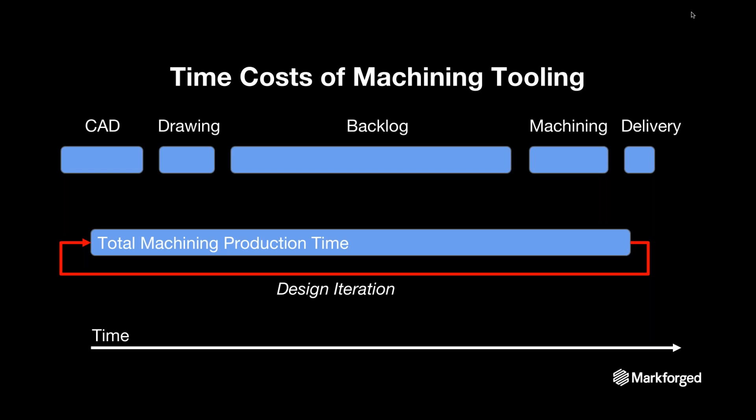And after machining, you get the delivery. So this is your total machining production time, which equates to one design iteration.

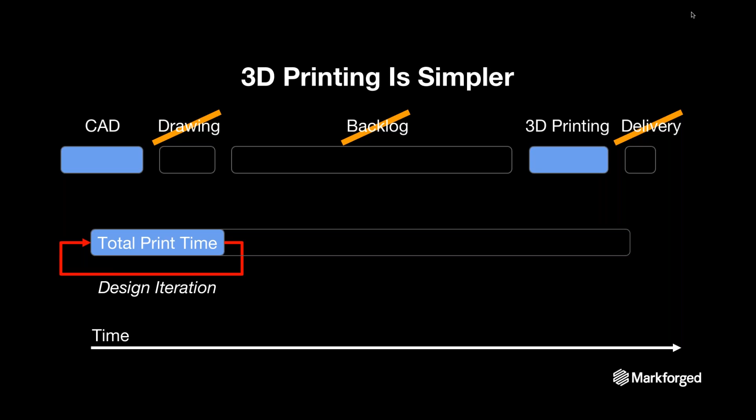With 3D printing, that becomes a lot simpler. You can go from a CAD file to a 3D printed part in your hand, skipping creating a drawing, skipping the backlog of submitting an RFQ, getting signature sign-off, submitting a PO, getting that part delivered, or even waiting in line for one of your machines to open up. You drastically shorten your design iteration time.

So within the same amount of time it took you to get Rev A in traditional manufacturing, you're able to go to Rev B, Rev C — arriving at your final part a lot quicker.

And that's not even counting the number of iterations you can have per print. Within the same amount of time it took to traditionally machine one iteration of a tooling, you can print 3 different iterations for that same amount of time, maybe 4, maybe 5 different iterations.

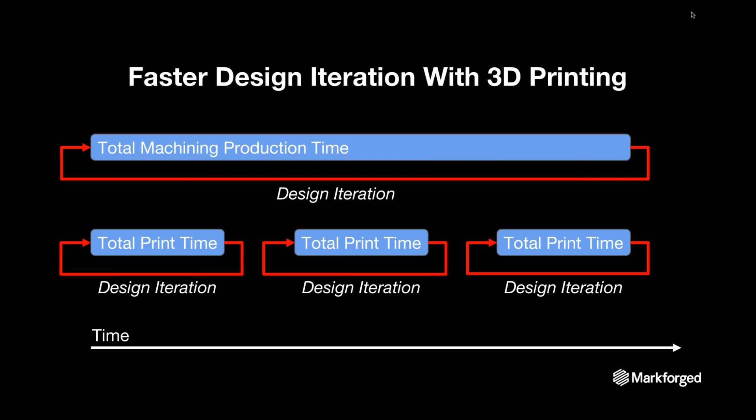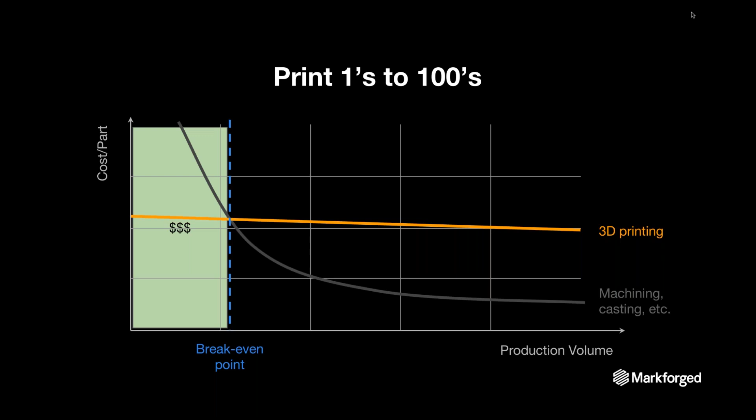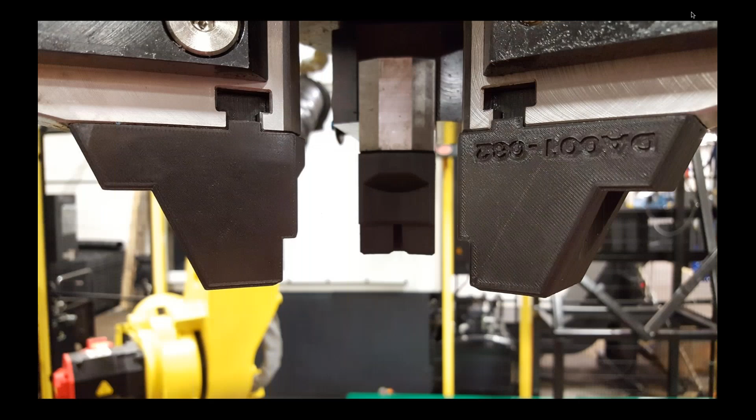For example, this is one of our customers, called Dixon Valves. They worked on gripper jaws that grip the coupling, and they had a set of three of these. These gripper jaws had to be very conformal, had to be strong, and had to withstand corrosive environments, so they had a lot of requirements. These were traditionally made in metal, machined in metal.

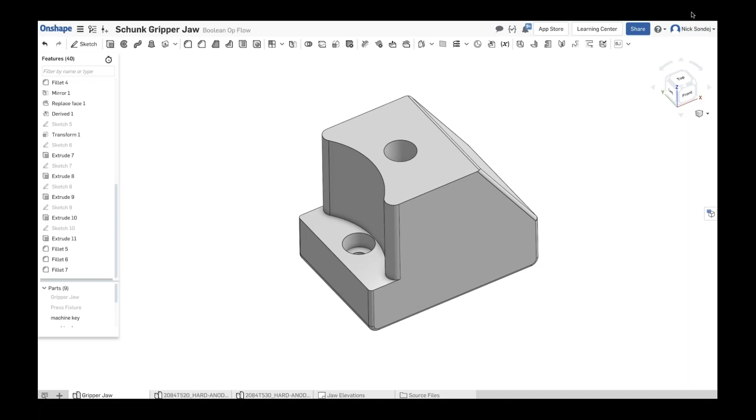A typical blank of a gripper jaw looks something like this. I'm going to hop over to my CAD software and show you what we were able to do very quickly, in 15 minutes, to make a conformal jaw.

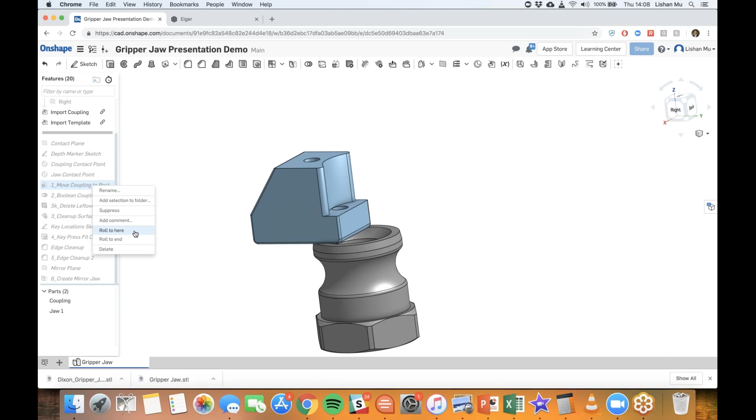This is the blank gripper jaw we were looking at. We pull in the coupling and position it onto where your gripper jaw is. You can see there's a bit of an intersection here because we want that conformal geometry of the coupling on our jaw. Taking a Boolean subtract, we're going to remove away that geometry. I'm going to hide the coupling, and you can see the missing area now where that conformal geometry is imprinted on the gripper jaw.

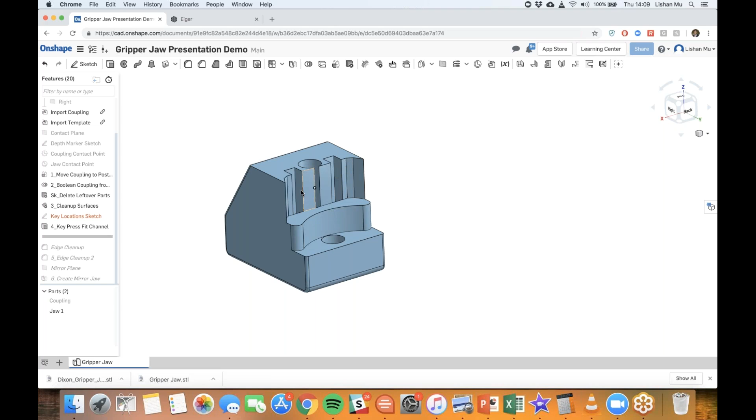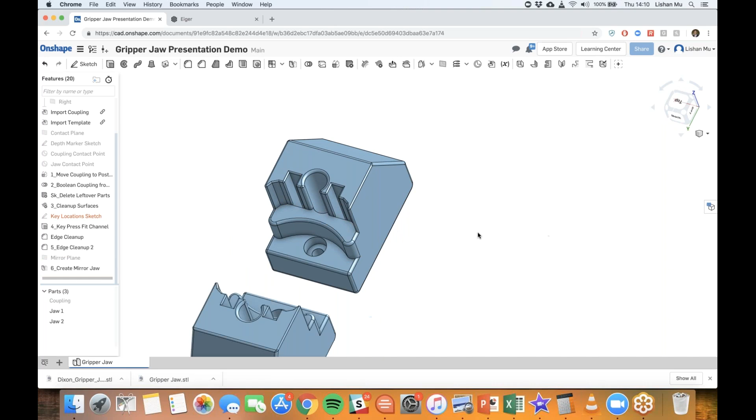From there, I'm going to clean up some of the surfaces and add key insert channels. Because that coupling is metal, and our base material, called Onyx, is a nylon 6 based material, over time as you rub a metal part against a nylon part, you'll wear away some of the surface, making your conformal surface out of tolerance. So we created channels here to use off-the-shelf key inserts as wear surfaces, extending the life of our jaw. From here, we clean up the surfaces, add some fillets and chamfers, take away the sharp edges, and simply mirror the part. Now you have a set of jaws that are conformal to holding this coupling.

So that's the CAD part. Now we're going to take it into what's called slicing, using Markforged slicing software called Eiger. I've already imported it here; the import is fairly easy to do. All you have to do is drag and drop, or you can upload from your library.

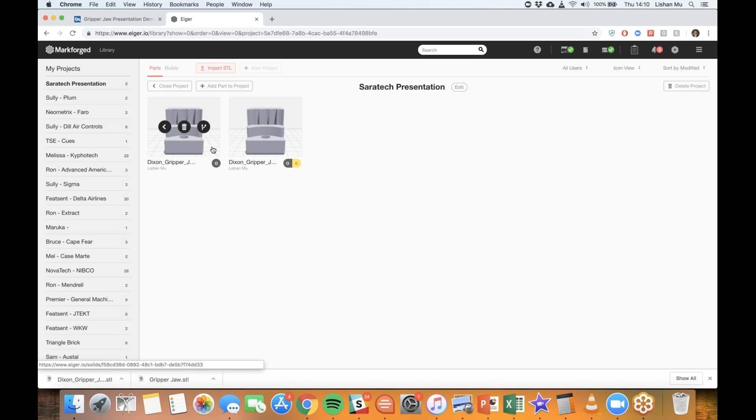So from here, I'm going to click into my sliced part. This is that jaw that we just designed here in our CAD software. This jaw, designed in CAD, I imported as an STL into our slicing software.

At default, we've added settings to optimize the print for your part. So once you upload your part to Eiger and save it, it's already pre-sliced. All your settings on the right-hand side can be changed, but you can leave it at default and hit print. The information shows how much it's going to cost due to material.

This jaw, one jaw, is going to cost $5.96. It's going to take about 5.5 hours to print. From here, you can dive into whether or not you want to add any kind of reinforcement, which I'll go over in a minute in my presentation. That fiber reinforcement is what makes these parts strong.

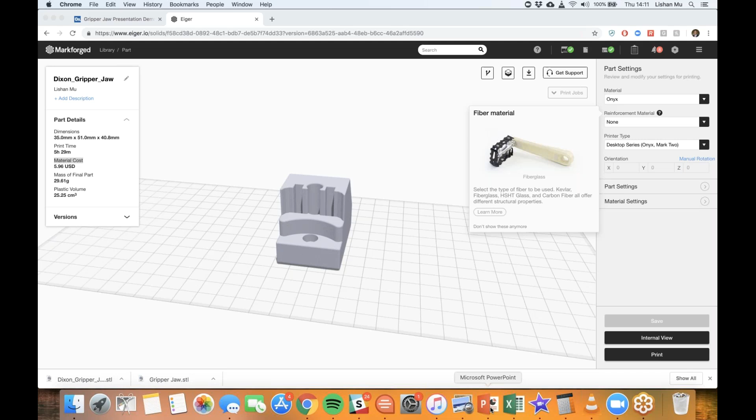So that's the part, upload it into Eiger. From there, you just change up your settings if you need to, hit print, and you'll have your part in your hand.

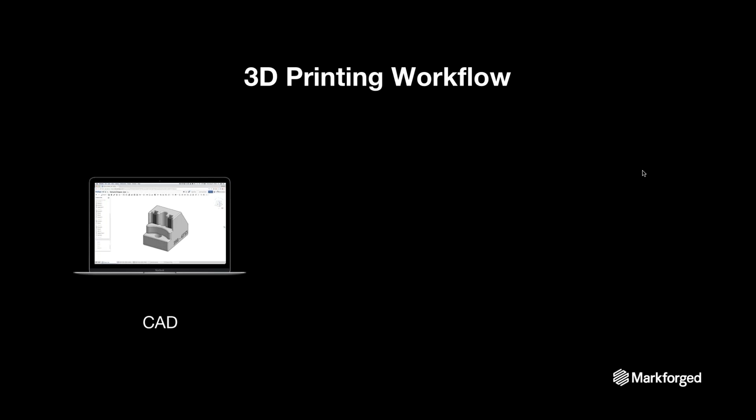So just a little overview of the 3D printing process. Like I said, it goes from designing in your own CAD software, to placing it into some slicing software, and then hitting print.

So what is slicing? We have a question here.

Jim wants to know, do you offer or do you have any training videos or anything that they can follow up with after this presentation?

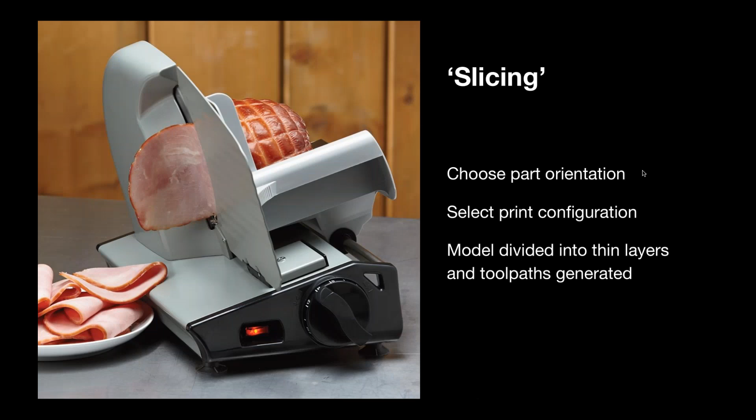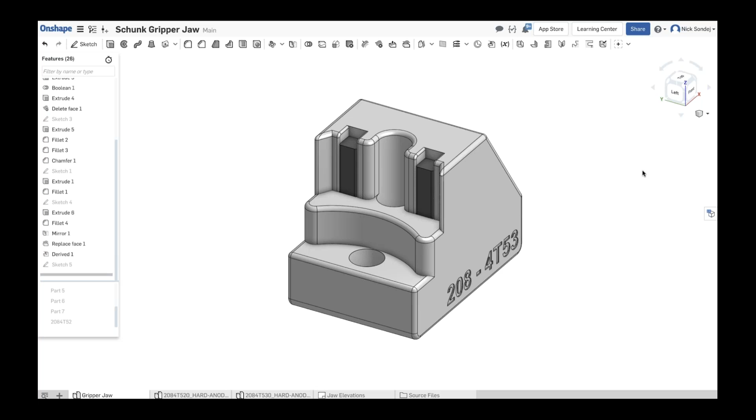Now, some of you might have a question: what exactly is slicing? You can imagine at your deli, you have your ham, and there's a slicer. What the program is doing is taking your CADed part and doing just that. It's taking it layer by layer and producing G-code on how to move the print head in order to print that layer. So depending on how you orient your part, how you configure it, how dense or hollow you want the infill, what kind of fiber you want to reinforce your part, the slicing software divides that part into however many layers and produces the G-code to the printer in order to actually print your part.

So taking that Dixon Valves gripper jaw, it's taking slices layer by layer and then reproducing it. Very similar to how CNC has CAM software, 3D printing has slicing software.

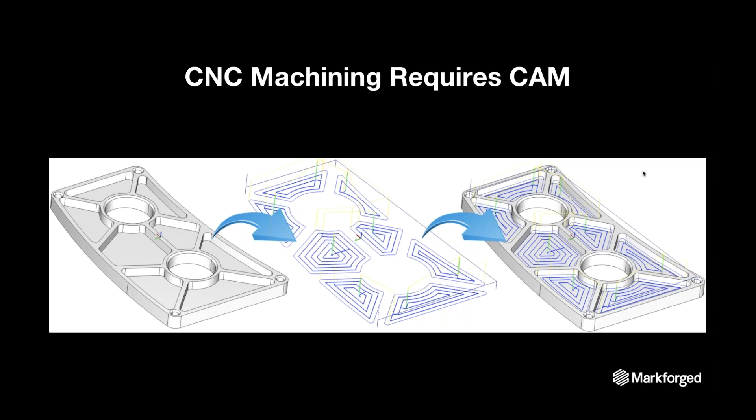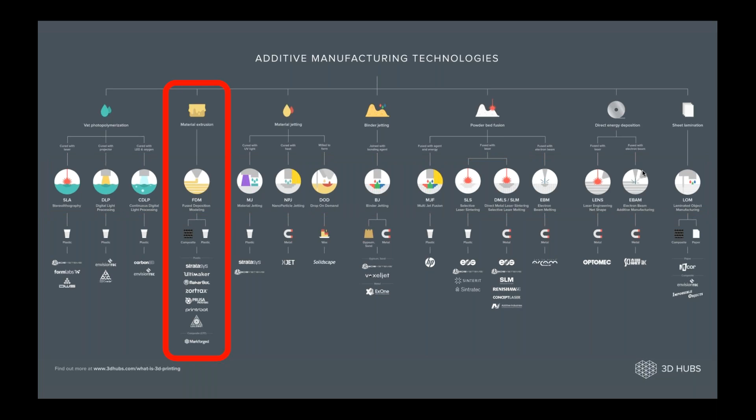So there are a lot of 3D printing solutions out there. On this page itself, you can see there's almost over 12 different 3D printing technologies. Ours falls into FDM, or extrusion-based 3D printing. Imagine a very high precision glue gun that's extruding the onyx material layer by layer to produce your part.

So this is kind of a very high level, rudimentary look at what a 3D printed part would look like.

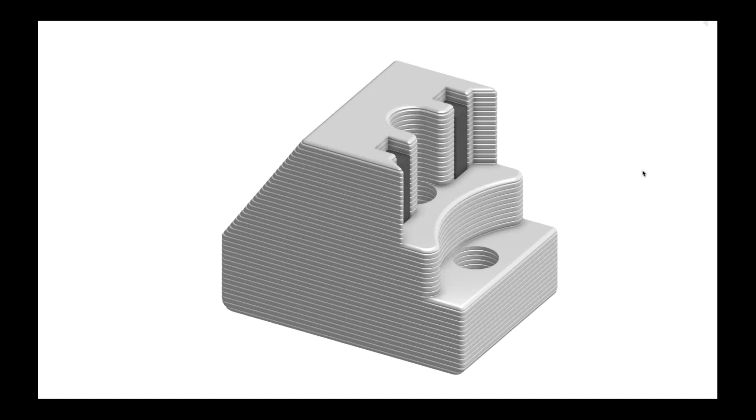This is where Markforged separates itself from all the 3D printing technologies out there. Even with extrusion-based 3D printing, where it's a high precision glue gun, we have what's called continuous filament fabrication. So what that means is you design your part in CAD, you slice your part, and during the slicing phase, as I was showing you earlier in our slicing software, you can reinforce your part with Kevlar, fiberglass, or carbon fiber. Those three options allow you to reinforce your part, making it as strong as 6061 aluminum and capable of replacing tooling, fixtures, and jigs on your shop floor.

Going from the slicing software, it sends over the print information to your printer, and it just prints, and you walk away.

So once again, we're looking at these Dixon valve gripper jaws. This is kind of what it looks like in a rudimentary sense when we lay in that continuous filament or fiber filament. We're taking a cross section of that part. Let's say it's printing up to this point. What it's doing is laying in the fiber continuously, in a continuous strand, around the perimeter of your part.

Now, a lot of companies out there are beginning to tell customers that they can print in carbon fiber. What they don't communicate is whether those are short strand fibers or continuous fibers. We are the only company in the world that can print in continuous fiber, because we have the patent on that technology. That's the bread and butter. That's kind of how we were founded—we wanted to print in carbon fiber, and having just chopped or short strand carbon fiber wasn't going to be strong enough.

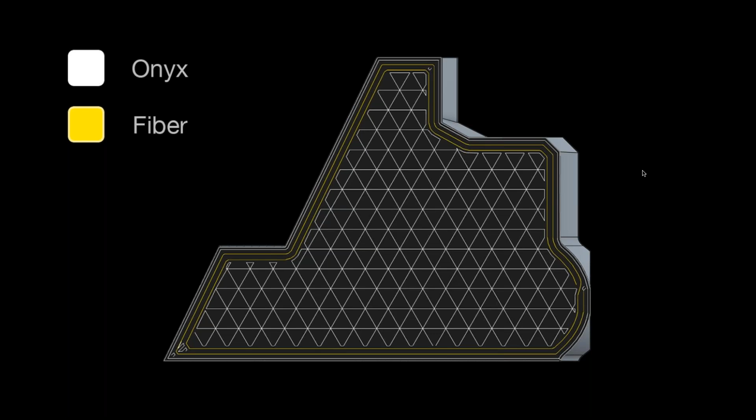Our Onyx material, our base polymer material, already contains chopped carbon fiber. That chopped carbon fiber makes our parts already 20 to 30% stronger than ABS, or what I like to call the gold standard of 3D printing materials. It's already stronger than ABS. It's when you add in the continuous fiber, whether it be fiberglass, Kevlar, or carbon fiber, to reinforce your part, that's when you're able to use it for functional prototyping, functional tooling, functional jigs and fixtures, and CMM fixtures.

And this is what it actually looks like in real life. This is an actual cutaway of a part, one of those Dixon gripper jaws, showing the continuous fiber that's routed on the perimeter of the part. And on the inside, you can see there's that triangular grid pattern.

That's our hollow infill. You will actually have a honeycomb hollow infill through your part: one, saving on material; two, saving on print time; and three, saving on weight. That was significant for Dixon Valves, because if you imagine these gripper jaws, three of them are picking up something every day, moving it to another spot for machining. As it goes through these motions, any kind of reduction in weight increases efficiency and increases the life of that robotic arm.

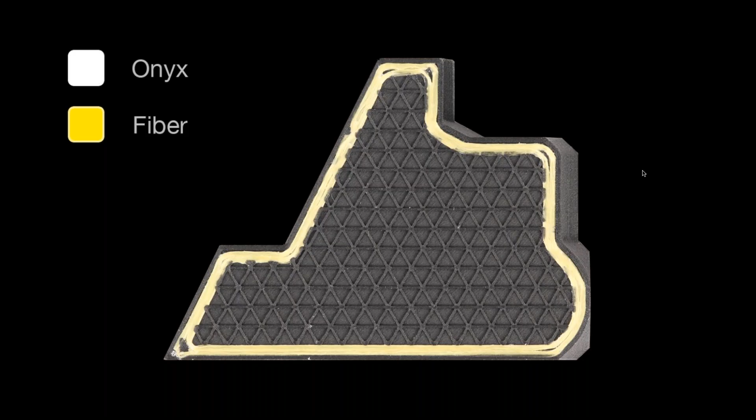Our metal printing solution uses what's called atomic diffusion additive manufacturing. So as opposed to DMLS or traditional metal printing, which uses metal powder, our process actually does not have free-flowing powder. All that powder is contained in a binder material when it's printed. It stays in the binder after it washes, where it gets debound a little bit. There's wax and a polymer that's actually holding the metal powder, and that metal powder doesn't get sintered until it goes into the sintering oven.

So this process, the ADAM process, is kind of a fusion of extrusion-based printing—the high precision glue gun—and metal injection molding, which has been in the industry since, I believe, the 50s. That process has been around for a while. We're just leveraging the back end and hijacking the front end. So instead of injecting a binder with metal powder in it, we're printing with a high precision glue gun, and then washing and sintering it the same way the MIM industry would do.

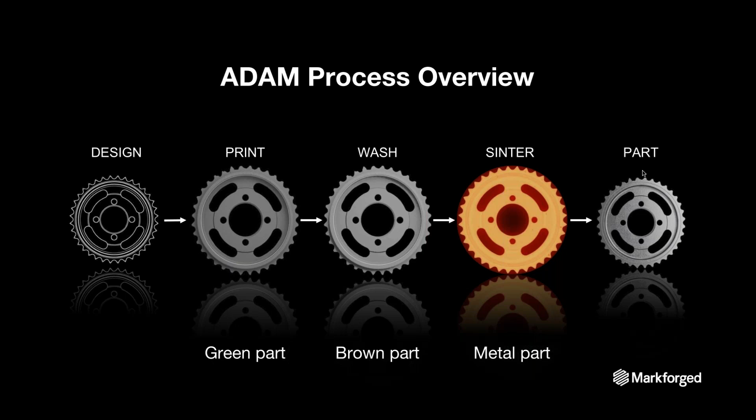Then you have what's called a green part, or a brown part after it comes out of the wash. The wash removes the wax binder. And then when you sinter it, it finally vaporizes the rest of the binder material and sinters your metal powder.

After sintering, the polymer is vaporized and the metal powder begins to, due to molecular forces, start attaching to each other and binding together to form a fully dense part.

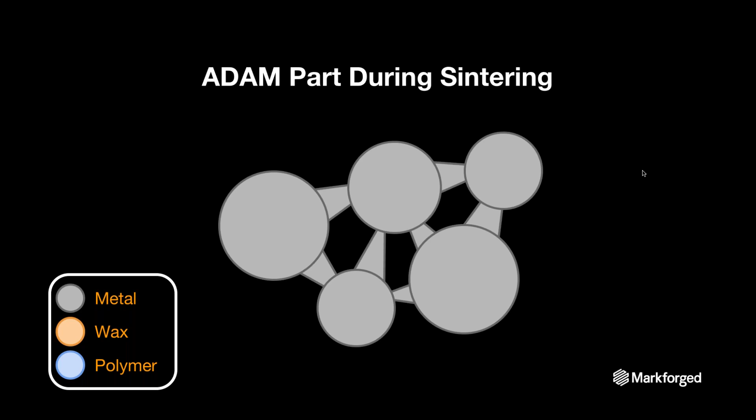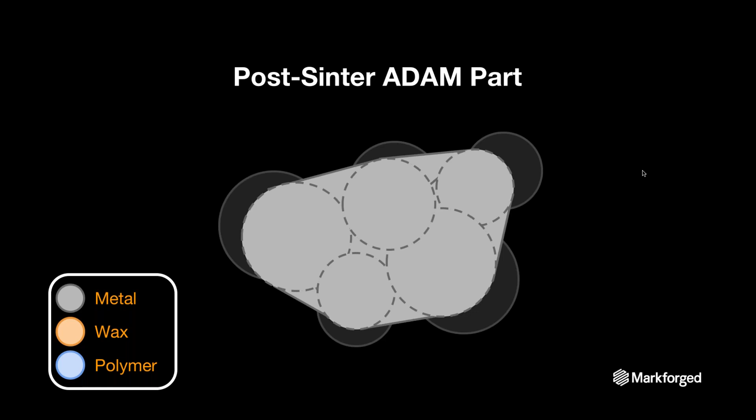At post-sinter, that part shrinks down roughly 17%. Our software accounts for that shrinkage depending on what material you choose, whether it be 17-4, which is what we have right now, to H13 that's coming out very soon, the A2, the D2, Titanium 6-4, Inco 625 - all those coming online will be able to be printed by the same printer, washed in the same wash, and sintered in the same oven.

So part scaling is taken into account by our Eiger software. You design your part in CAD, you export it at nominal, upload it to our Eiger software, and it will scale it the 20% that it predicts to account for the shrinkage. After it's printed and sintered, the finished part will shrink back to size as designed.

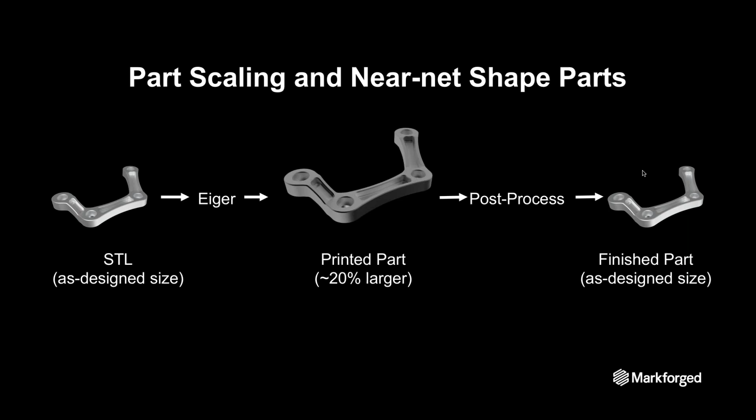So when you upload that part into our Eiger software, you can choose the part orientation, select what metal you'd like to use, and that's what's so nice about our printer versus the powder bed systems that are out there. Our metal printer - you're able to swap out materials.

Because it's on a spool, there's no free-flowing powder. You don't need to house your printer in a bomb-safe room. You don't need to house your printer in an environment where it's not combustible, right? You don't have to have the bunny suit, the respirator mask, so that you don't breathe in any free-flowing metal powder into your lungs or get it onto your skin and it creeps into your pores.

Because our material is bound in that wax and that polymer, there is no free-flowing powder. So when you need to switch out materials, you can do so freely without risking cross-contamination. You don't have to have a whole separate million-dollar printer just so you can use two different materials. Our one printer, one wash, one sinter oven can do all our materials.

Eiger will be able to quickly, in real time, generate the cost of your materials being used, as well as the time it's going to take to print and wash your part. From here, you send your part to the printer and you just walk away.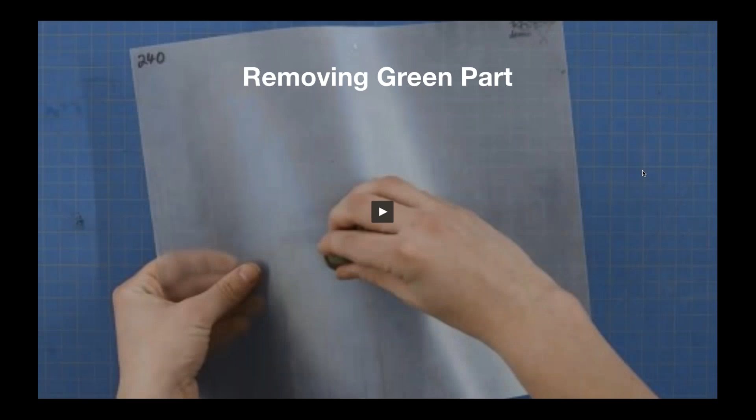So this is a video of how we're removing a green part. This is right after it printed, with the wax and polymer binder still in there, coming off the print bed.

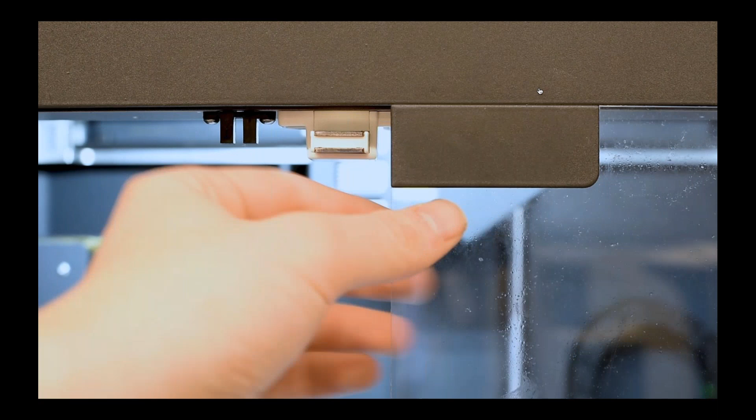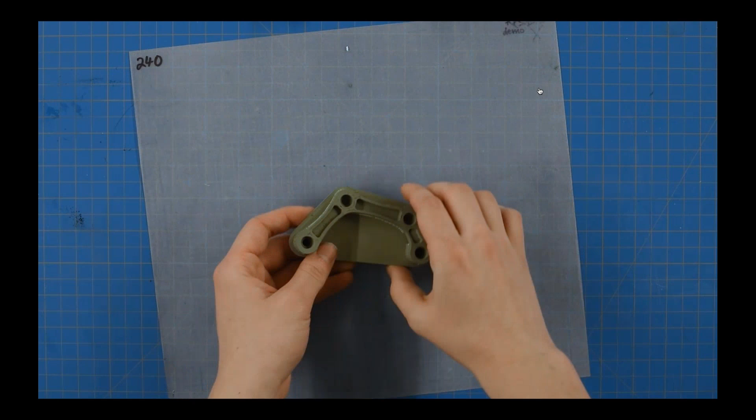They're opening it up. Like I said, you don't have to wear a respirator mask or a bunny suit, or have a bomb safe room, or even wire EDM this part off. All you do is take the print sheet out of the printer and peel your part off the print sheet. Now it's ready to go into the wash.

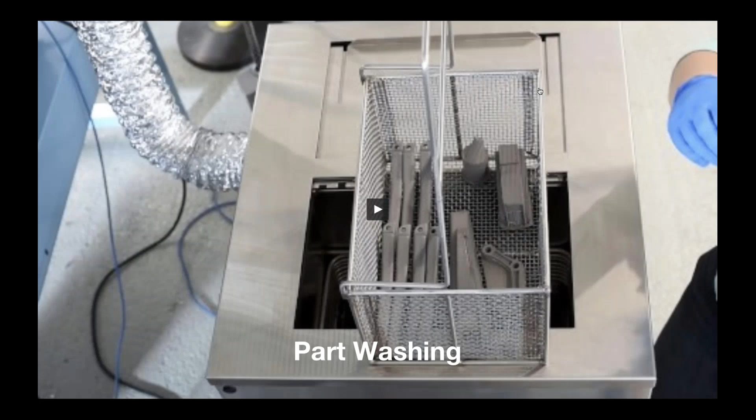So when you place it into the wash, the workflow is: measure your part, record the weight, and it will kick off a timer in Eiger. What's great about Eiger is it's integrated with your account, and it will send you an email when your print is complete, when it's ready to wash, when your part is in the wash, and when it's done washing.

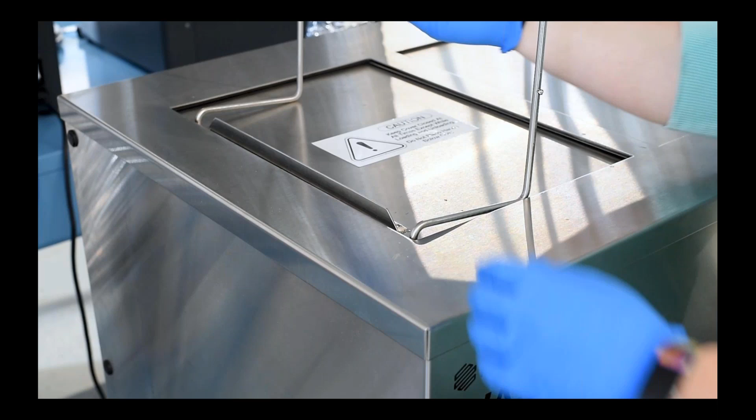After you allow it to drip dry, because there is a solvent in the wash called Opteon SF79 - an off-the-shelf chemical industrial grade degreaser - we use it to remove the wax from your green state part, producing now a brown state part.

So this person is placing the part into the wash. It kind of looks like a French fryer.

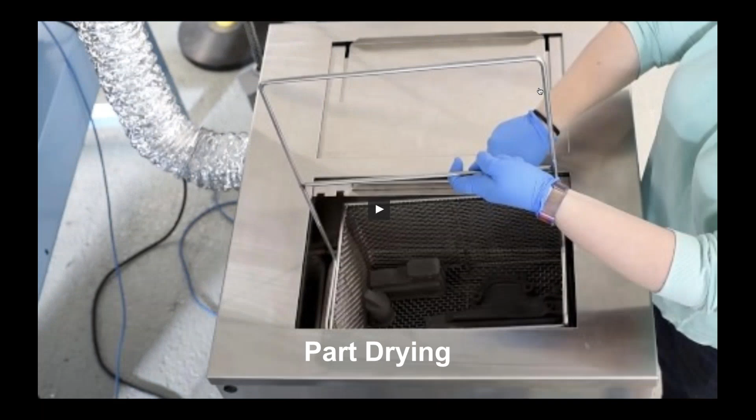So this is just showing you it drying. All they're doing is taking out that rack and placing it on the other side of this washer so that they can allow the part to just air dry.

From there, the workflow - remember you weighed the part before you placed it in there - you now reweigh your part. As long as it dropped 4.2% by mass, your part is ready to go into the sinter oven.

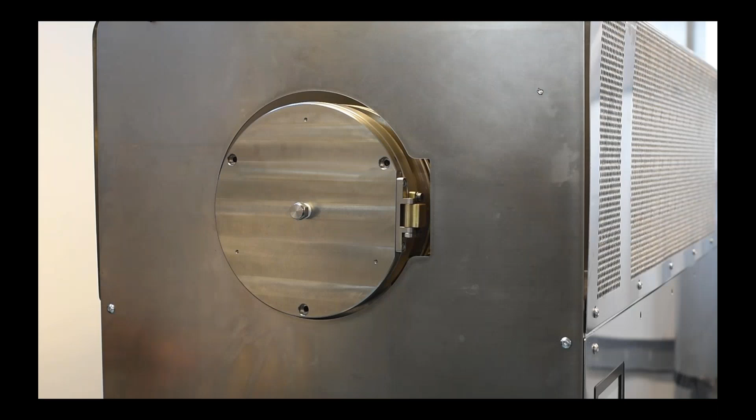This is a video of how they're loading a part into the sintering oven. So that part is now a brown state part, done washing. You place it on the setter plate, and you slide that setter plate into the sinter oven.

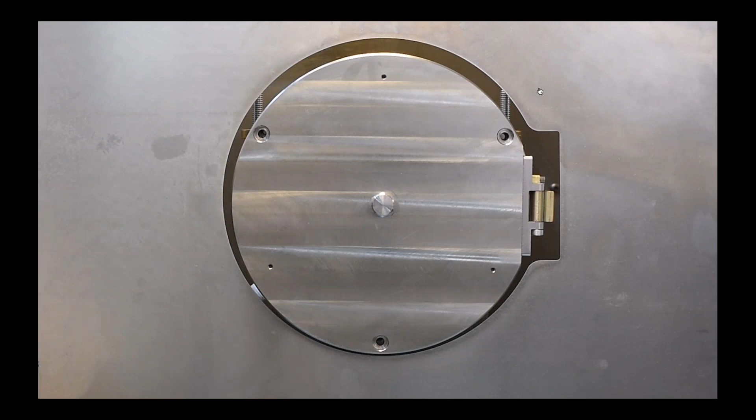So right now everything's at ambient. You seal off the sintering furnace and kick it off. He's sealing it off now. From there, once again, Eiger is accounting for the sinter run.

So in that video, you saw that he placed one part in the sintering oven. You can place multiple parts into the sintering oven - as long as you fill that setter plate, that's where your economies of scale start kicking in. You print, you load up your wash with as many parts as you need to wash. All of them are going to be timered and accounted for in Eiger.

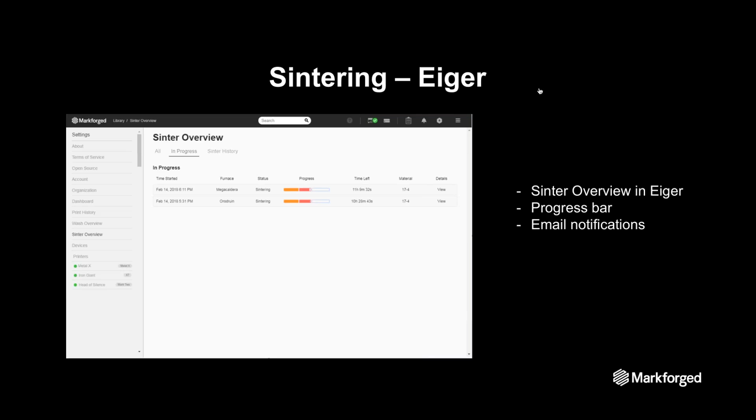You'll get an email when it's done washing. Pull your part out, place it all in the sintering oven, kick it off. 24 hours later, you have your finished part. This is what it looks like unloading the part from the sintering oven.

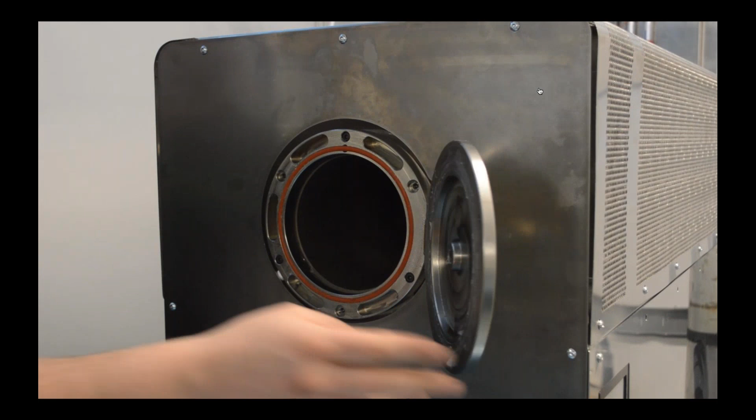It's hot, so he's wearing gloves. And now you'll see he has his fully sintered part.

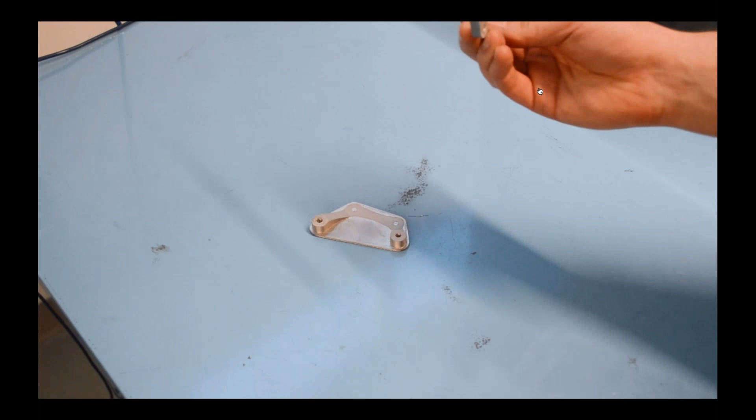So what it's sitting on is what's called a raft. That raft is accounting for - and you see how he pulls off the part right off the ceramic release layer - the drag forces against the setter plate, so that it can ensure uniform shrinkage.

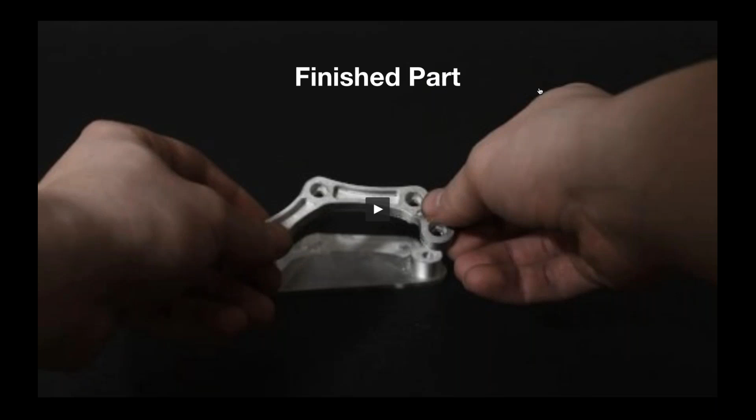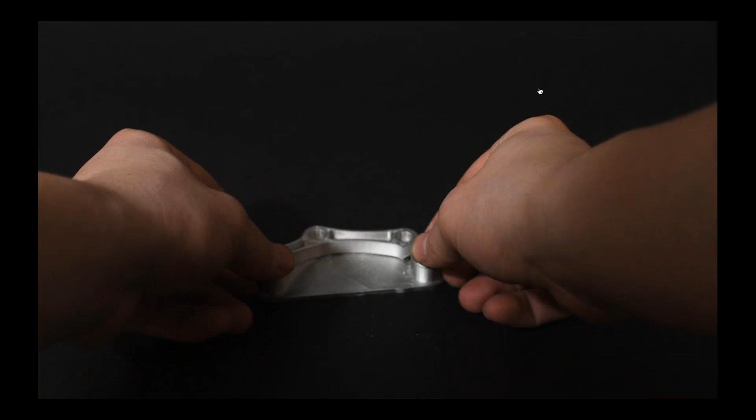So this is what the finished part looks like. This finished part is 17-4 stainless steel. Anything you can do to 17-4 stainless steel, you can do to this 3D printed part.

Remember, we only hijacked the front end of metal injection molding. So instead of using an extruder and injecting the metal powder bound in a binder material, we're using a high precision hot glue gun to print the material, or print your part. After that, everything's the same.

So you can heat treat the 17-4 stainless steel, you can weld to it, you can machine it, you can polish it, you can do whatever you need to do to hit any kind of critical dimensions. You can tap it so you can get the threads you need. Anything you can do with 17-4 stainless steel, you can do with this finished part.

So how do I adapt existing designs for 3D printing? Features to consider are threaded features and cantilever features that you currently have. So if you have a part today and want to use it for 3D printing, can you just print it? These are the questions you're going to have to go through.

Do they have threaded features? Do you want to print those threads, or do you want to leverage off-the-shelf threaded inserts, nuts, or bolts? Cantilever overhangs - you want to minimize support material being used, so you minimize your cost of materials and minimize your print time. Right? Surface finish requirements.

Like I was saying with the 17-4 stainless steel part that we just printed, if you have critical surfaces, add on some machining stock so you can go back and machine that surface to be within tolerance. So treat it as a casted part. Interlayer shear strength - understanding how to orient your part so that it's strong enough to resist the forces during its function.

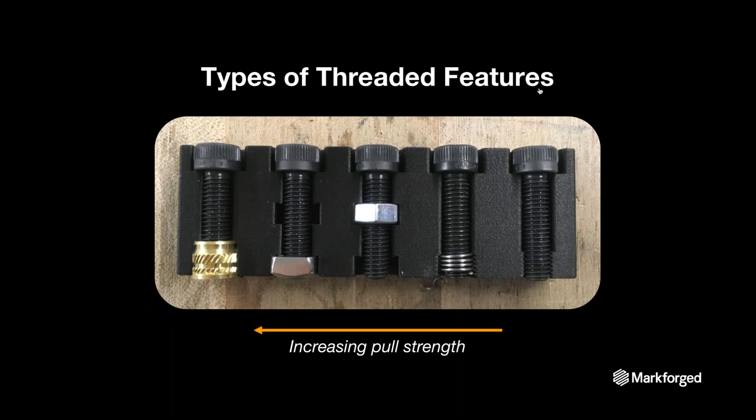So threaded features - we have a heat set insert on the far left. As we move across from right to left, the pull-out strength increases. So your heat set insert on the far left is going to be your strongest in pull-out strength. Then comes a square nut, a hex nut, a helical insert, or if you tapped or printed your threads.

So we're purely looking at composites here. You can also use any of these solutions for your metal. You can also print your threads, but I always recommend tapping those threads or using helicoils.

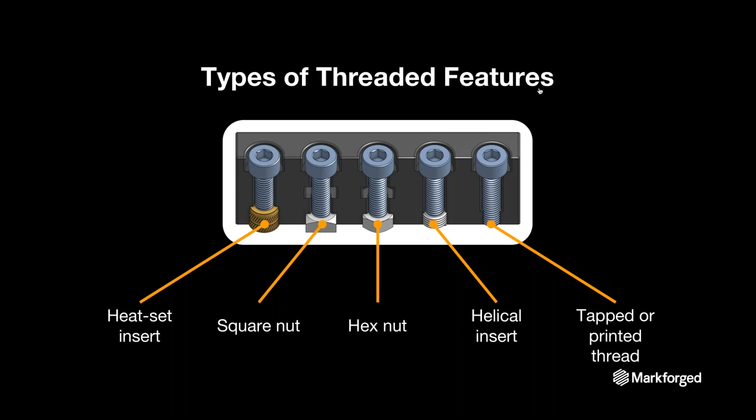So this is kind of the best practice here. And someone had the question of, do you guys have tutorials or walkthroughs online? We have a lot of information on how you design for heat set inserts, off-the-shelf heat set inserts from McMaster-Carr - how do I CAD in and make sure that I have a part where the hole size is created so that I can use off-the-shelf inserts. We have all that material online, and heat set inserts is one of our go-tos for composite parts when you're looking at threaded features.

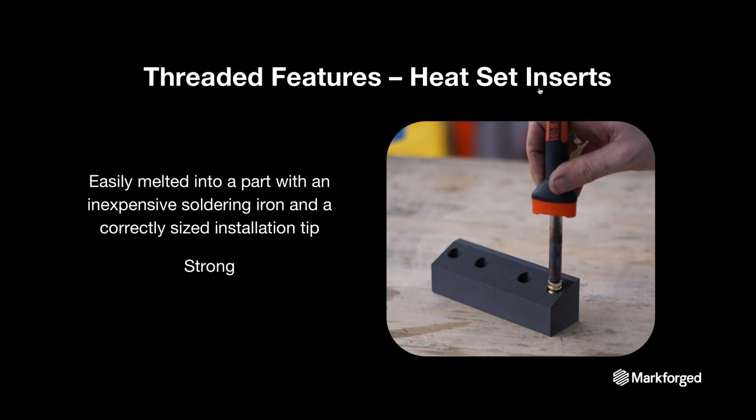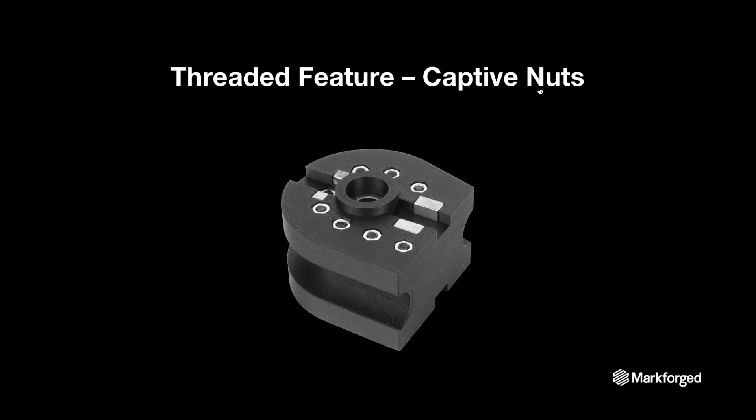Also, square nuts or hex nuts - this is an example of a hex nut that's shouldered up on one side of this pipe bending tool. So it's very easy to embed parts. Right now, mid-print, this person has taken the print bed off the printer, press fit or placed into the cavities the hex nuts, and now the printer is printing right over them.

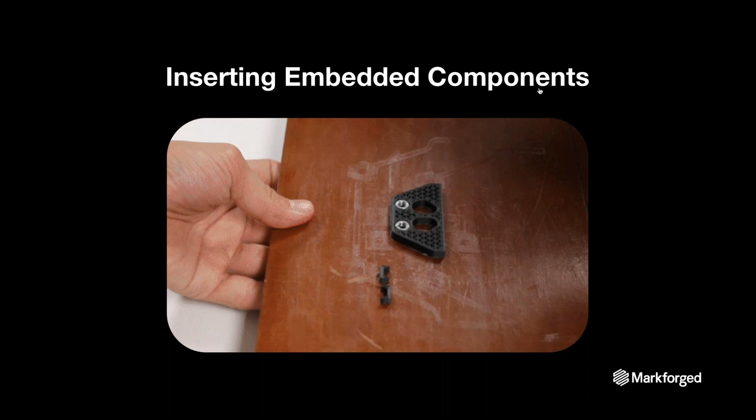So you can set into Eiger, the slicing software, exactly when you want it to pause and email you that it's ready for your captive nuts. You walk over there and you drop in your nuts. You can drop in RFIDs, you can drop in magnets, wherever your imagination takes you.

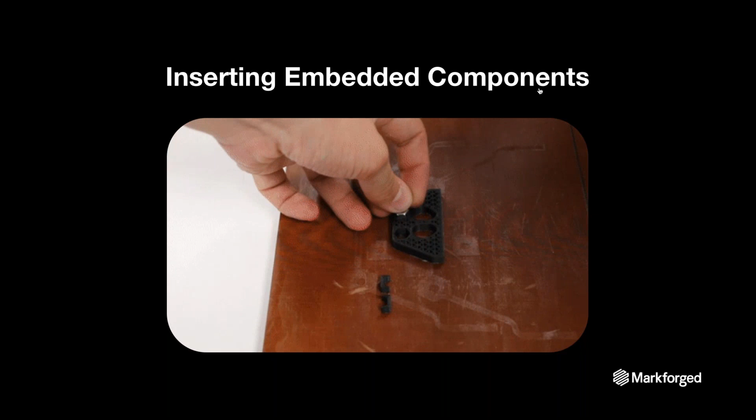Helical inserts are also great to use. I like to recommend using these whenever you have either damaged threads that you initially printed, or now you just printed for the application of using helical inserts.

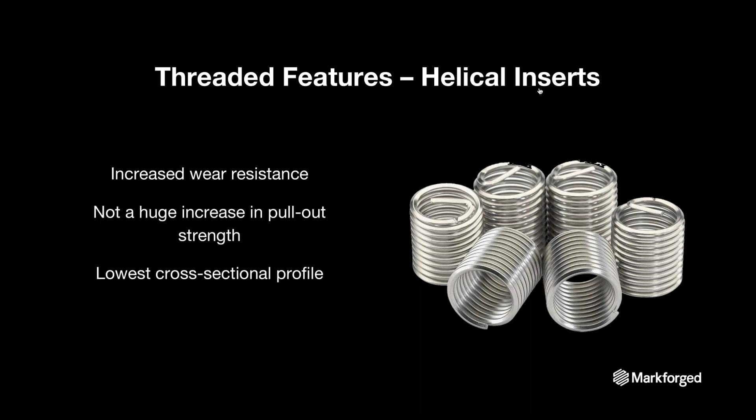So for threaded features, avoid printed threads whenever possible. You can really only achieve the pull-out strength of the nylon material if you use printed threads. It's best if you're going to print your threads to print holes in the axial direction, the z-axis. Printed threads can get down to an M3 or an 8 thread, and are only good for a single installation - if you remove and reinstall a printed thread, you're really going to shorten the life of that part.

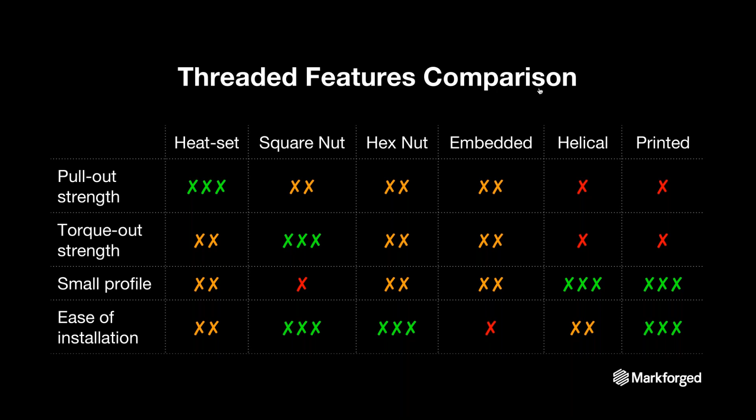This is just a high level graph once it's distributed out, and you guys can take a look at this information and understand, depending on my requirement, am I looking at torque-out strength? Is it a very small profile? Ease of installation? What are my requirements for that thread? If I don't really need pull-out strength, I don't need to use a heat set insert - maybe I can just get away with using a hex nut or a square nut.

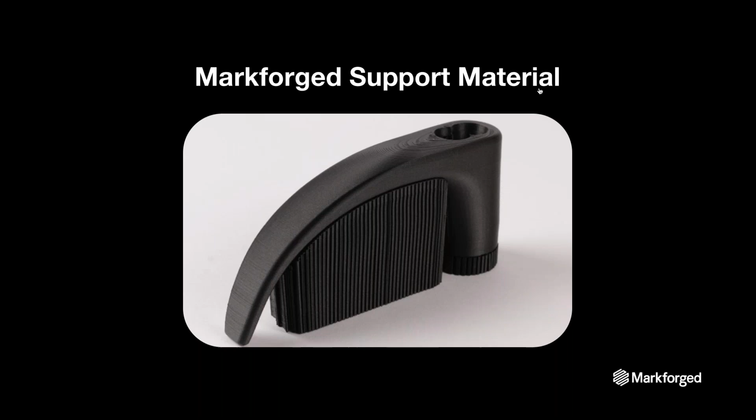Avoid orienting your part to where you're going to use a lot of support material. For example, this part is a door handle. Oriented in this orientation, you're going to have support material to support that entire length of the handle. So whenever you have these overhangs and bridges, try to design them with chamfers at 45 degrees so that they are self-supporting overhangs.

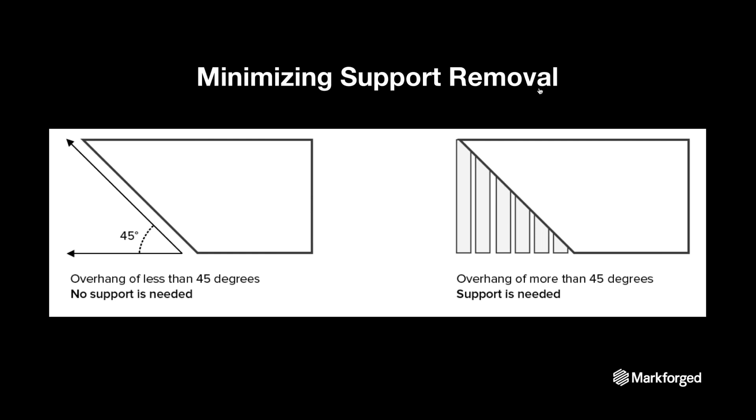Anything less than 45 degrees from the horizontal will require supports. Or sorry, more.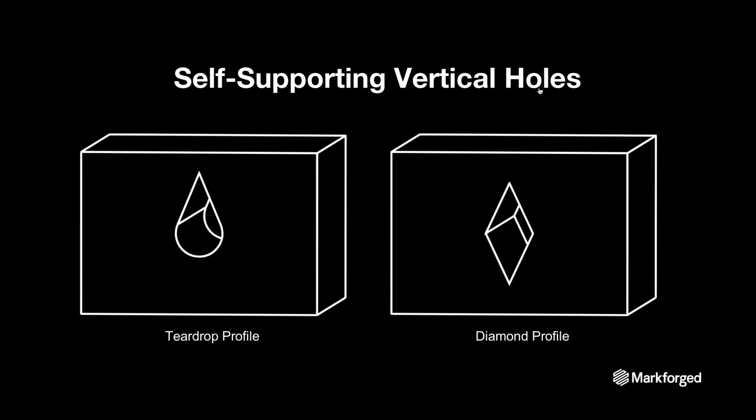Also, if you have requirements for surface finish, there's surface finish versus time, right? The higher resolution, printing at 50 microns, so very thin layers, 2 thou layers or slices, that's going to take a longer time to print compared to if you printed at 8 thou or 200 microns.

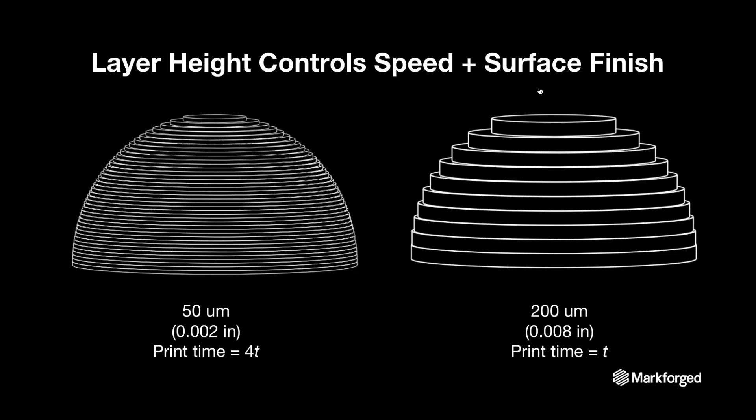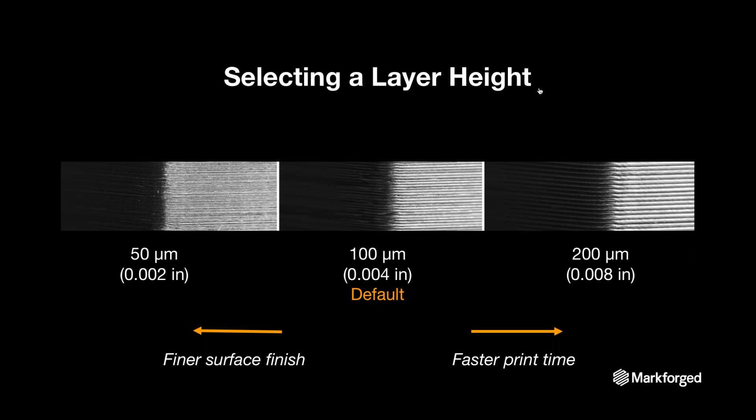So depending on what your requirements are, whether it be print time or surface finish, you have to give or take here. Selecting that layer height, you can see far left is our 50 microns or 2 thou layer height versus 200 microns or 8 thou layer height on the far right. So choosing the proper layer height: thicker prints faster, thinner gives a better surface finish. We have it defaulted at about 100 microns, which is the sweet spot in between.

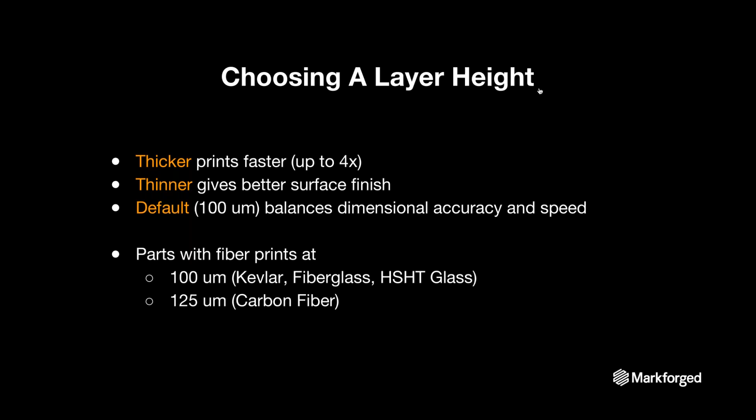Sometimes you need more strength in the Z-axis. If you're familiar with 3D printing, you'll know that interlayer strength, printing in Z as you go up a part, that strength in tension is a lot weaker than your XY when you're printing parallel to the print bed. So how we counter that is using bolts for Z-axis strength.

So prints in the Z, obviously, are going to be the weakest. Design through bolts in those regions where you need the Z strength, as well as in the XY, when you can't find the right orientation, this is a solution. Add fiber to reinforce under the bolt and the nut to distribute that compression force, that bearing force essentially, across the face.

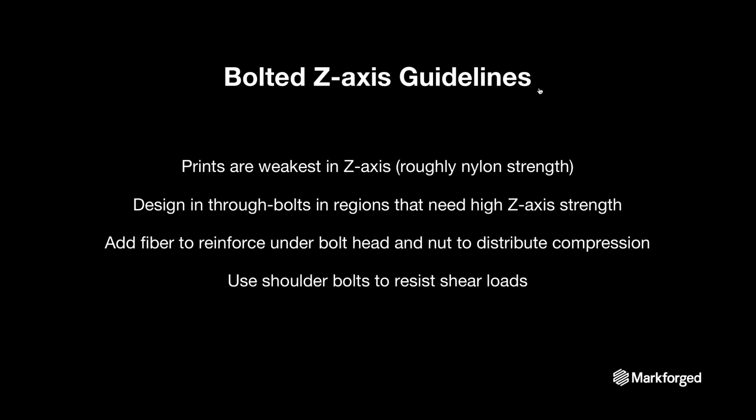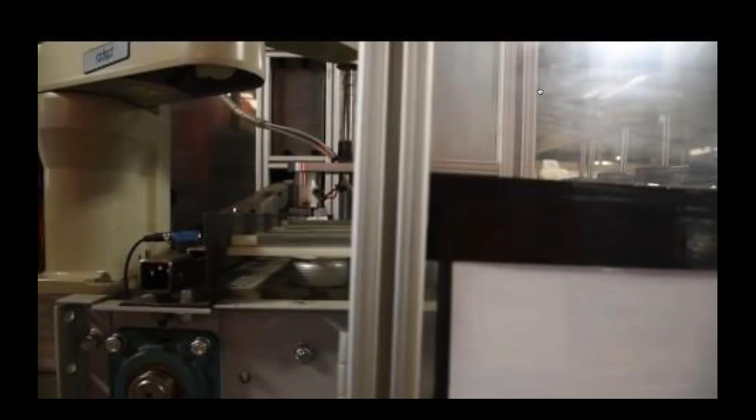This is what we did with the tube bending die. So a quick design example here, where we go over how you can iterate quickly with 3D printing. We talked about those jaws, those gripper jaws.

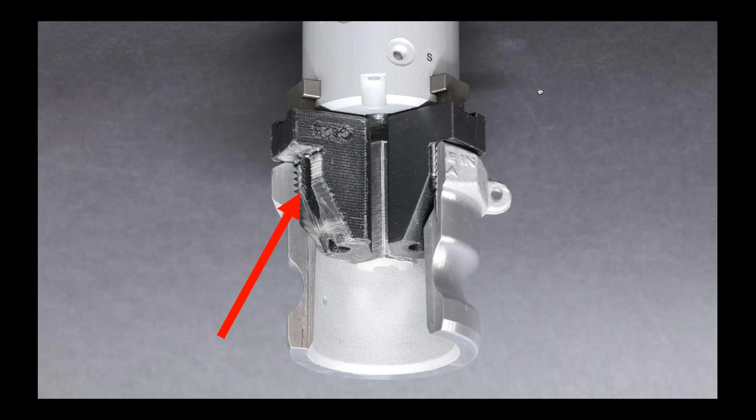This is another type of jaw that was seeing a lot of abrasion. It was a 3-jaw gripper that wore really quickly because of the ID threads on the part it was picking up. So how do we extend the jaw life while retaining fast iterations? We could go to a metal solution, but metal might take longer. So how do we keep composites while preventing our composite material from wearing away, therefore extending the jaw life?

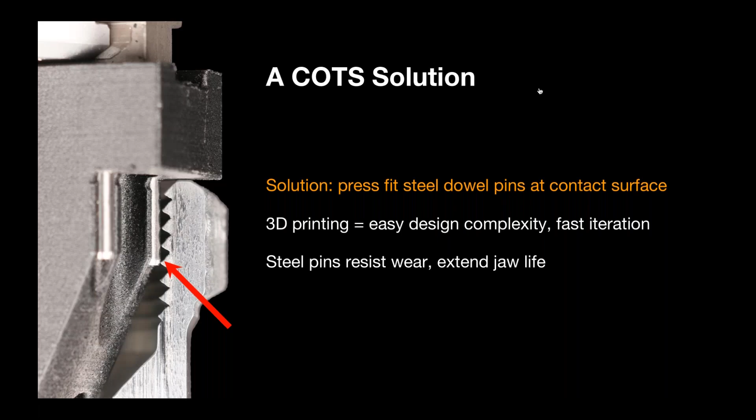So instead of printing with just the nylon, we created cavities to press fit dowel pins, just like the gripper jaws we looked at earlier, where we designed in cavities for key inserts as wear surfaces. We're doing the same thing here: designing cavities to press fit steel dowel pins that you can get off the shelf, so that now those dowel pins are the wear surfaces, extending the jaw life.

So what if the jaw pressure causes the pins to damage the internal threads? What if that pressure now, you save the jaw's life, but you're damaging the ID threads that are critical? 3D printing offers us high geometric control and fast iteration cycles.

So what that means is you can take your 3 jaws with the 2 dowel pins, and iterate to having multiple jaws with 12 dowel pins on there to distribute that compression force on the ID threads. You print off a set of these. That's not enough, so you iterate to the next design in CAD. 15 minutes later, you have a new design. So it's very easy to design in CAD and see your solution in your hands very quickly.

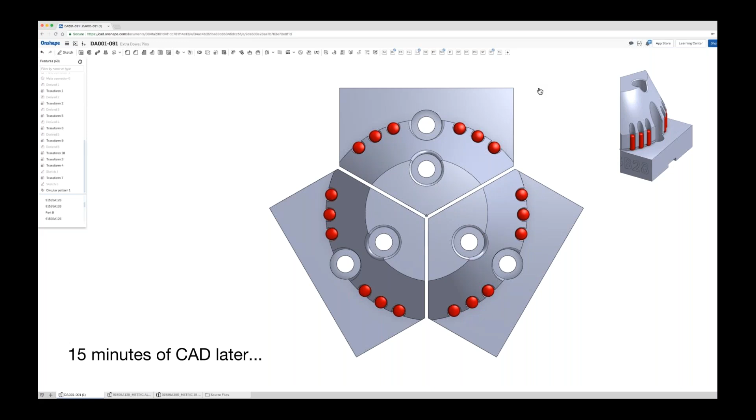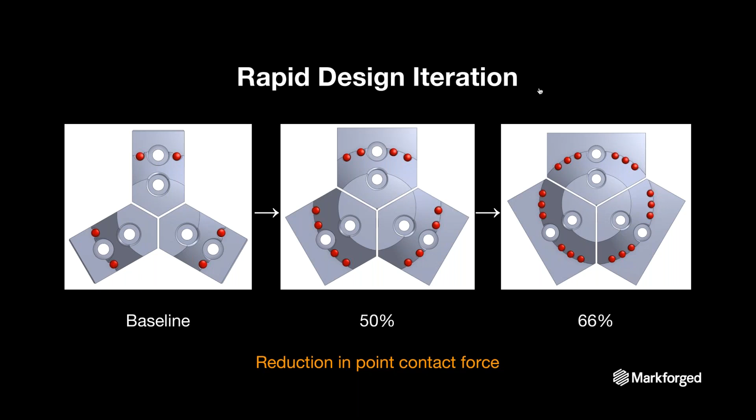So rapid design iteration on your tooling, going from a baseline to understanding how much a reduction in point contact force saves the ID threads of your actual production part. This goes back to what we were discussing earlier, where in the time it would take you to get Rev A done in traditional manufacturing, you can go through Rev B, Rev C, Rev D, even Rev E with 3D printing.

A little bit about Markforged. We were founded out of MIT back in 2013. We're headquartered up in Boston, Massachusetts, with now near 200 plus employees and growing every day. We shipped our first printer back in 2014, and year-over-year growth, we're looking at 300%. As of last month, November, we had our 200th metal unit in the field.

Markforged is a complete solution. We have software engineers that handle the software, the slicing software, pushing new updates and fixing bugs every day. We handle the hardware, with 2 contract manufacturers up in Boston that produce our printers. And we produce our own material in-house - the engineering grade material, the onyx with chopped carbon fiber, continuous carbon fiber, Kevlar, and fiberglass. By controlling all 3 of those variables - software, hardware, and material - we control all possibilities of failure and ensure all aspects of quality.

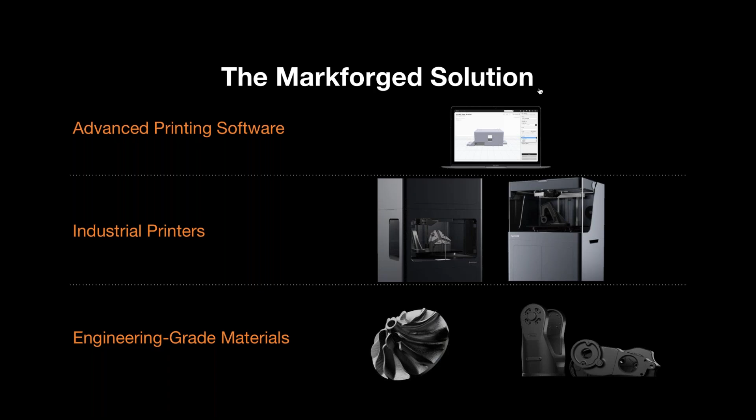Markforged enables customers to produce stronger, functional parts faster and at a lower cost that serve the needs of a wide range of applications across the entire manufacturing lifecycle. Thank you guys for your time. Are there any questions?

Thank you. Great job. That was so informative. There was one more question. Jim said he already owns a Markforged printer and he wants to know how he can get the biggest return

For his investment quickly - identifying a lot of those applications on your shop floor, if you do work in a shop floor environment, those are where you're going to find the quick wins. What I like to ask our customers to do is sit back and think about what are the major cost drivers and pain points in your business today. What is causing you the most money, the most headaches? What's a pain in the butt because you have to source it out to this one vendor, or they're always taking 4 to 6 weeks and it keeps getting pushed back? There's delays in production or delays in the delivery of a part. What is holding up your business? What's causing you to lose money? What's causing you to lose sleep? Anything like that is usually a good candidate for 3D printing.

From there, you can figure out what's the greatest return on getting that part printed. How many parts are you looking to print? There's a couple of variables you balance there to quickly get a return. But usually it's your high lead time parts, your high cost parts, and the ones that are one-off or that you scrap after using one time.